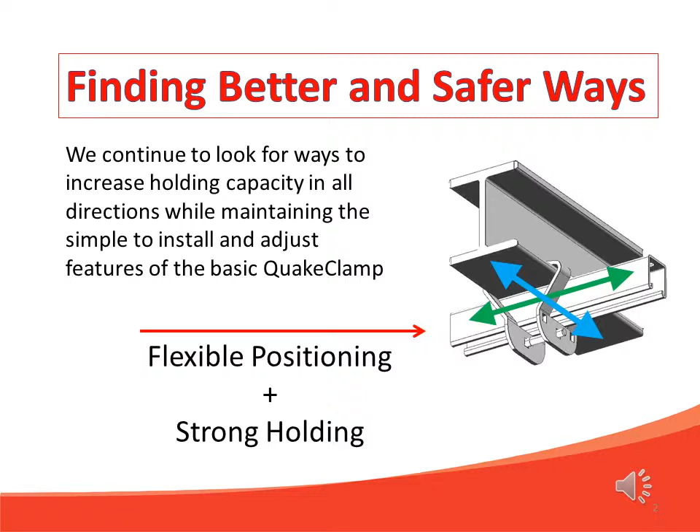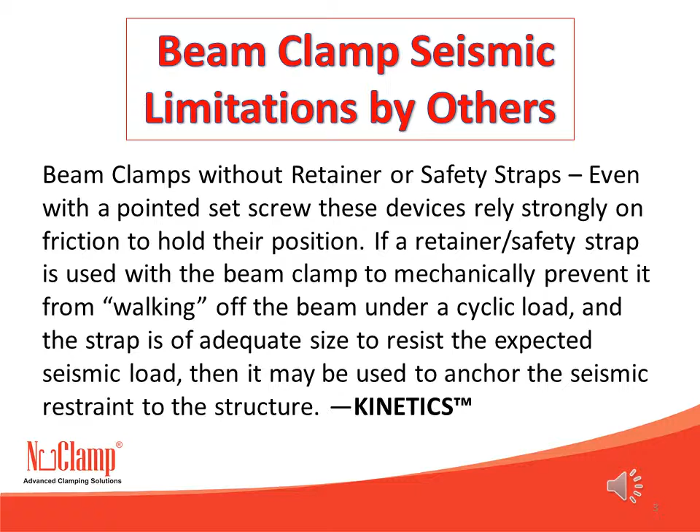This is taken from Kinetics documents. Beam clamps without retainer or safety straps, even with a pointed set screw, these devices rely strongly on friction to hold their position. If a retainer/safety strap is used with a beam clamp to mechanically prevent it from walking off the beam under a cyclic load, and the strap is of adequate size to resist the expected seismic load, then it may be used to anchor the seismic restraint to the structure. Kinetics trademark.

From Kinetics. Chapter 13. Seismic Design Requirements for Non-Structural Components. ASCE 13.4. Component attachments shall be bolted, welded, or otherwise positively fastened without consideration of frictional resistance produced by the effects of gravity. A continuous load path of sufficient strength and stiffness between the component and the supporting structure shall be provided. Local elements of the structure including connections shall be designed and constructed for the component forces where they control the design of the elements or their connections.

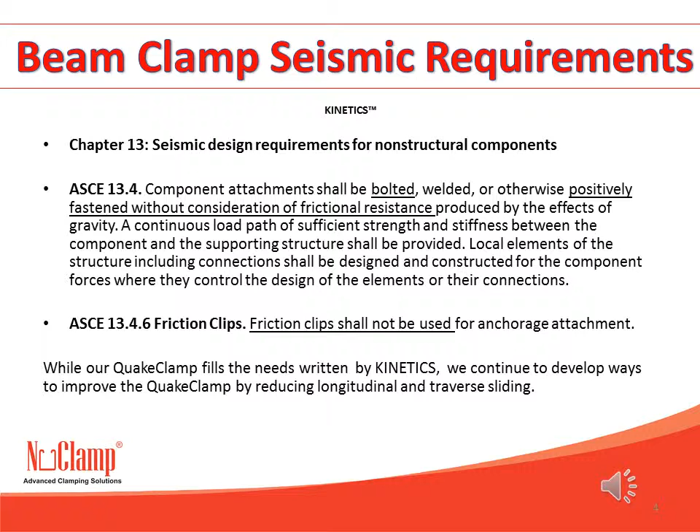ASCE 13.4.6 Friction clips. Friction clips shall not be used for anchorage attachment. While our QuakeClamp fills the needs written by Kinetics, we continue to develop ways to improve the QuakeClamp by reducing longitudinal and transverse sliding.

The normal limit to what the QuakeClamp will hold is governed by the strength of the strut channel and the longitudinal slipping of the clamp on the beam. While the QuakeClamp performs well for normal use, we have found two ways to reduce slipping on the beam flange. First, a set screw in the middle of the hook area can be added to increase the force that causes sliding to 3,200 pounds. Second, a weld bump can be placed on both edges of the beam flanges located to provide stops for the edge of the clamp body hooks to bump against.

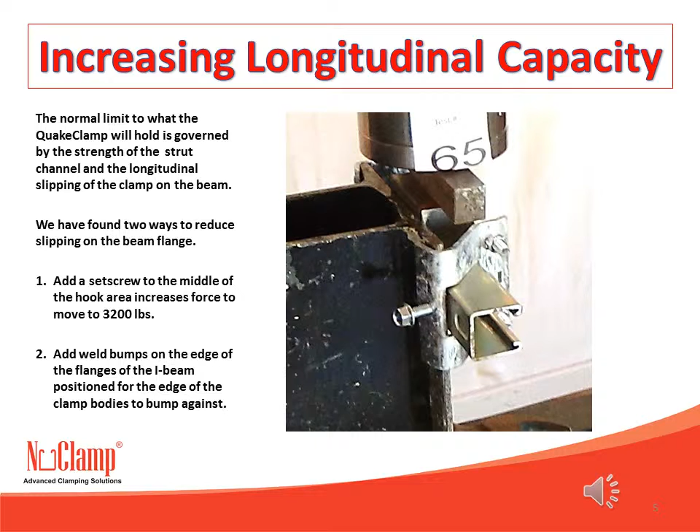These options provide advantages for struts attached to sloping or vertical beams. They are also recommended in environments where shaking and vibration are possible. A new capacity now available that is not otherwise available, except by welding struts to I-beams, is to attach struts to vertical beams using our QuakeClamp. The QuakeClamp will hold greater cantilevered forces than the strut channel can sustain without bending.

We can do better. The normal limit to what the QuakeClamp will hold is governed by the strength of the strut channel and the longitudinal slipping of the side of the clamp on the beam. We have found two ways to reduce slipping on the beam flange. These methods are the same as shown above in reference to longitudinal forces.

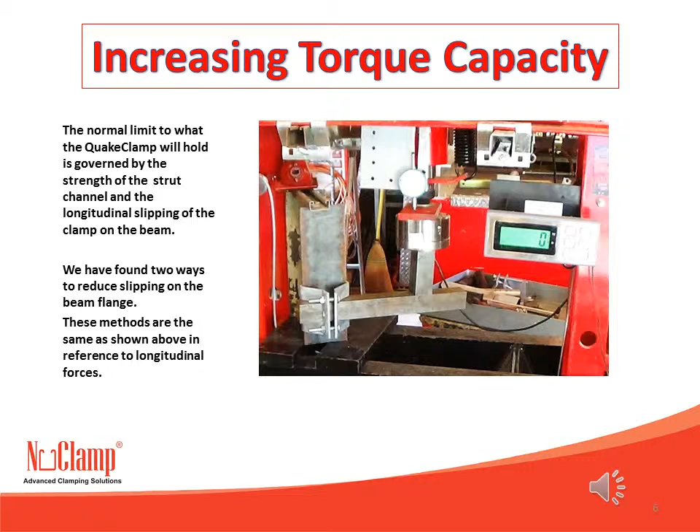We have found many ways that the sliding of the strut channel can be reduced or completely stopped. The simplest method is to use a standard strut nut, 1 or 2 square flat washers and a bolt. They are positioned against either side of the clamp. This will work either against the bolted flange or against the hook. This significantly reduces sliding while using common components. We are developing and testing a family of U-clip hangers and bolt extension clips that will provide a number of more useful options.

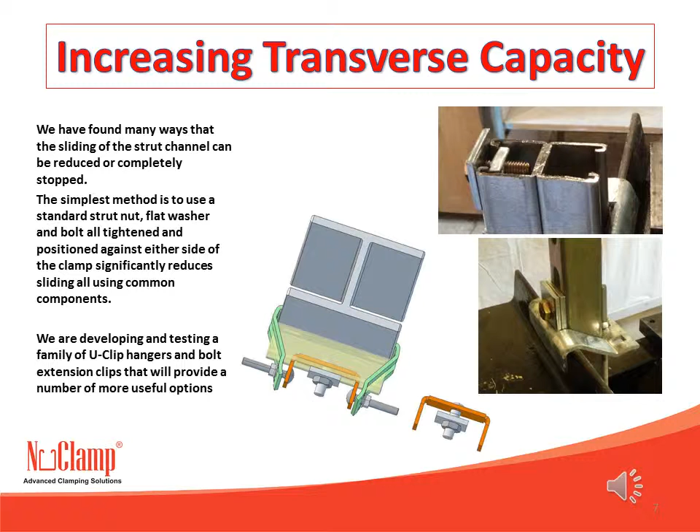The QuakeClamp is stronger than the strut channel. In most situations the clamp is not what fails. We see greater use for the QuakeClamp system in the future beyond just hanging strut channels. This is why we continue to look for ways to increase its capacity and function.

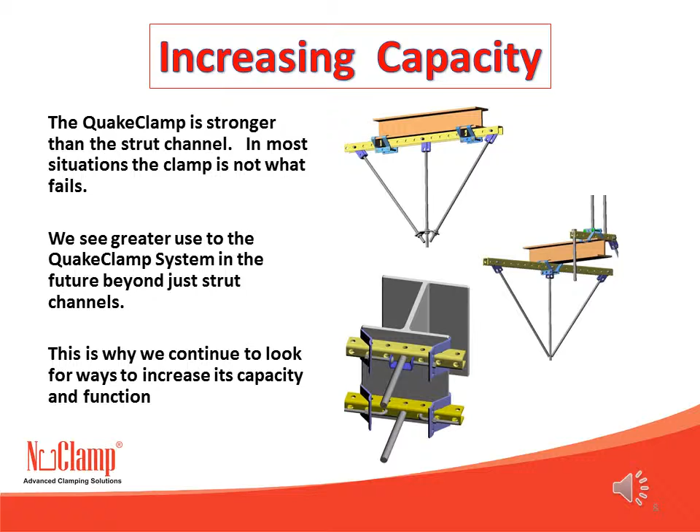The newest innovation to the QuakeClamp system is the hanger clips. In the simplest form, it is a flat strip of steel that has notches to engage the inside of the strut channel. It has a hole that lines up with the center bolt connecting the two sides of the clamp together. It has another hole that loads can be attached to. One clip will hold approximately the full load of one side of the clamp assembly. They can be attached to both sides of the assembly or sandwiched together to entrap a flat surface being supported.

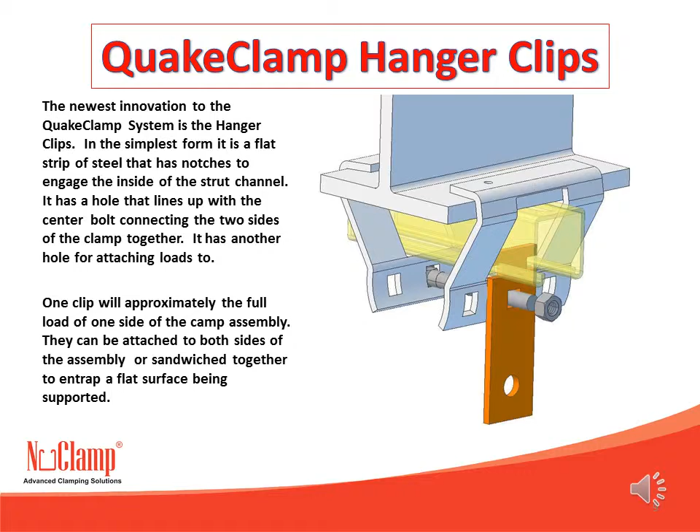Here are some examples of U-shaped hanger clips. They function basically the same as the single clip. They can be anchored to the clamps in similar fashion but can be located independently at a carriage bolt. A washer and a nut are added to the middle as a way to hold them in place. This product also works to hold the entire assembly in place. If placed in between the clamp bodies, it allows two short bolts to be used instead of one long one.

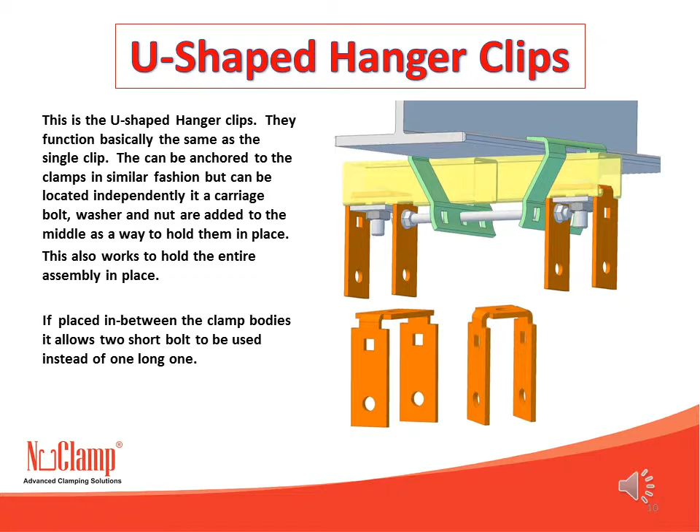Shown are several examples of simple hanger clips that get attached to the QuakeClamp. They all attach inside of the strut channel, captured to the outside of the QuakeClamp by the bolt or bolts that hold the two halves of the clamp together. Because the clamp bodies entrap the strut at the mounting point, strut failure is prevented. Each one will hold the whole load of the side of the clamp they are attached to.

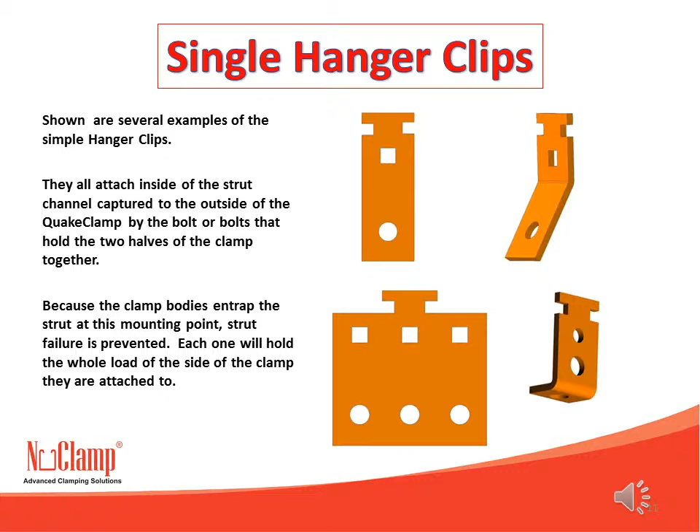As was previously said, if U-shaped hanger clips are placed in between the clamp bodies, it allows two short bolts to be used instead of one long one. It is also possible to use a long piece of threaded rod to make unique configurations. Also shown is a U-shaped clip that has teeth to provide greater gripping to the strut channel. On the bottom side of the beam, a threaded rod along with nuts and washers is used to attach the hanger clip and create a threaded hanger rod.

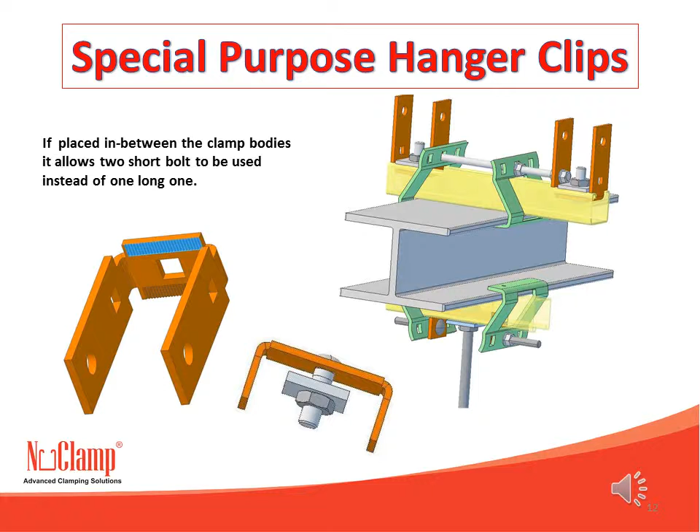This U-shaped hanger clip allows for either a threaded rod to connect, or can be used to support a second strut channel in line with the beam. One side needs to be secured to the outside of the clamp, but the whole U-clip can be on the outside of the clamp assembly as well as on the inside as shown.

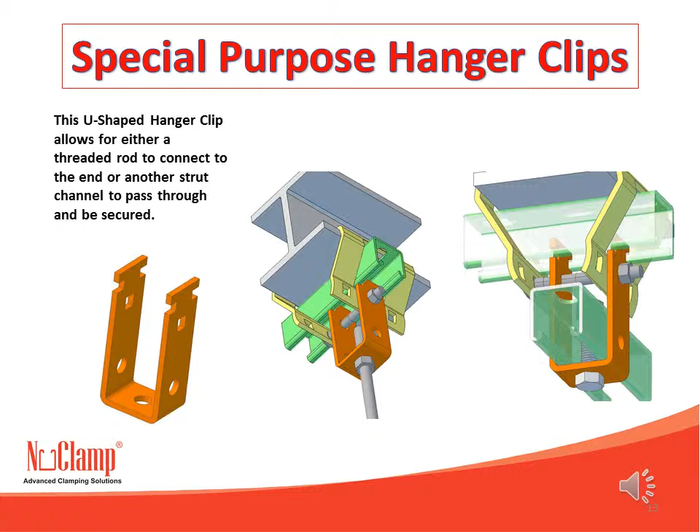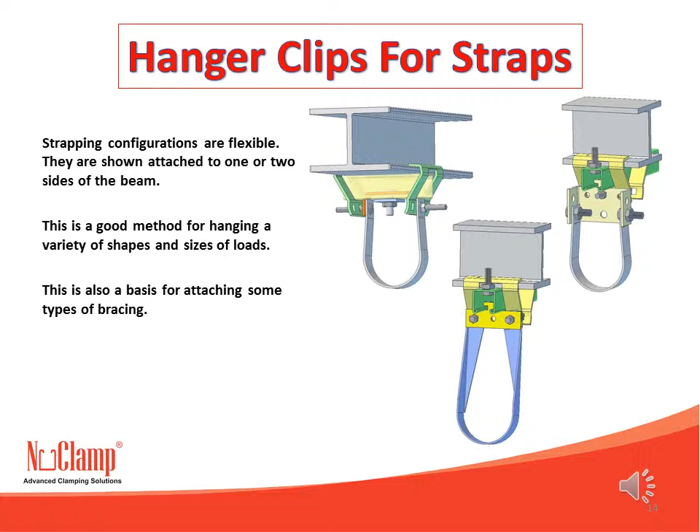Strapping configurations are flexible. They are shown attached to one side of the beam. They also can be attached to clips on opposite sides of the beam. This is a good method for hanging a variety of shapes and sizes of loads. This also provides a basis for attaching some types of bracing.

We have clamps for 3 flange thickness sizes. There is a range of flange thicknesses for each size. The flange thickness they each work with overlaps. All 3 will actually work on a middle thickness of I-beam flange. Identification holes are placed on the flange so an installer can quickly identify the size in hand.

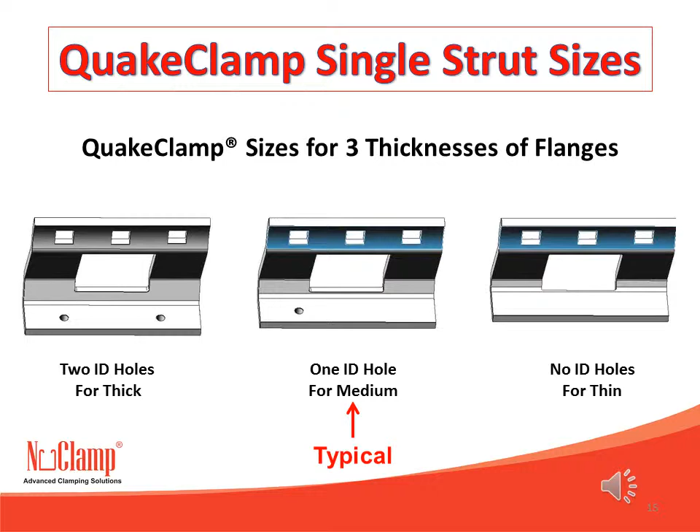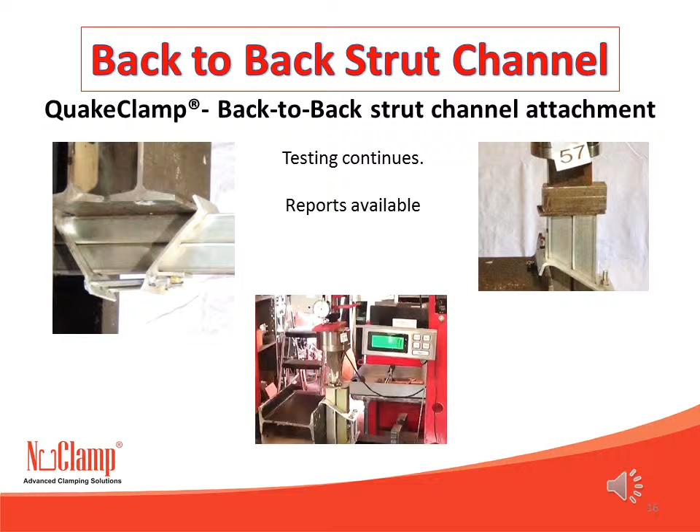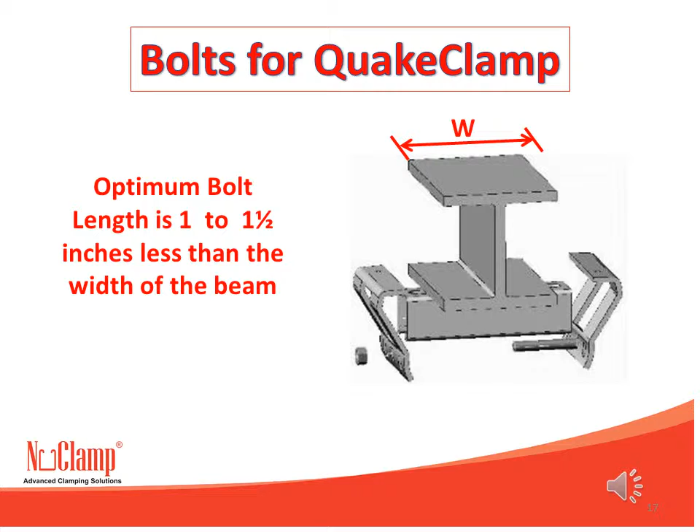The load on the connecting bolt is very low. Any 3/8 inch bolt will work. Square holes are placed in the clamp so carriage bolts are a good option. 1 or 2 bolts can be used. Using 2 bolts is best for reduced sliding. During testing it was found that the nuts can be tightened from 5 foot-pounds of torque to 15 foot-pounds and still allow the clamp to hold over 11,000 pounds. The preferred length is about 1 inch less than the width of the beam.

Let's do a quick review for why QuakeClamp should be used. First is safety: load capacity, less musculoskeletal stress, positive connection, seismic applications, reduced falling object hazard, easy adjustment. Second is versatility: hanger assembly options, simple trapeze hanger, inline options, vertical possibilities. Third and most important is the saving of money: 1 bolt assembly, more accessible design, 1/4 the installation time.